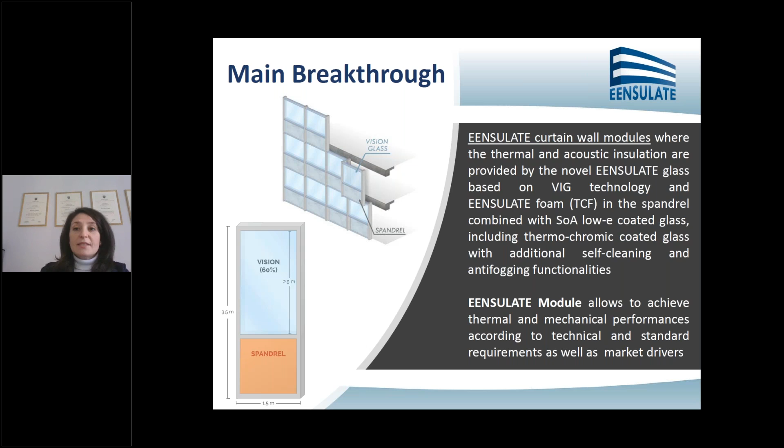Now I'm going to go into a bit more detail concerning the technologies we developed for producing the insulated products. In particular, the vacuum insulated glass is a lightweight and thin double pane assembled thanks to innovative sealant and getter technologies, for the transparent part of the facade as well as for window applications. In addition, for the spandrel part, we developed a highly insulated foam based on monocomponent and bicomponent elements.

Concerning the VIG, the vacuum insulated glasses have been developed by BGTEC, a company based in Poland, with the support of the rest of the consortium. BGTEC developed a tailored manufacturing process implementing both innovative sealant and getter strips to ensure the target performances for the final product, with a target U-value of around 0.36 to 0.44 watts per square meter Kelvin.

During this project, we developed several small-scale prototypes of 500 millimeters and also large-scale prototypes. Currently, BGTEC is assembling the latest real-scale VIG for the pilot's application.

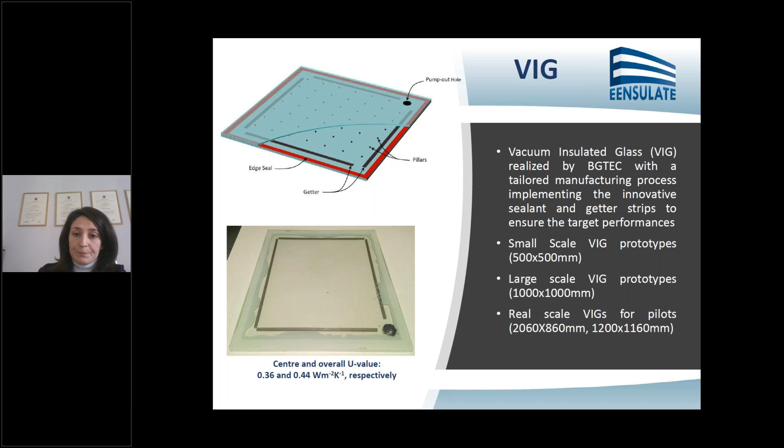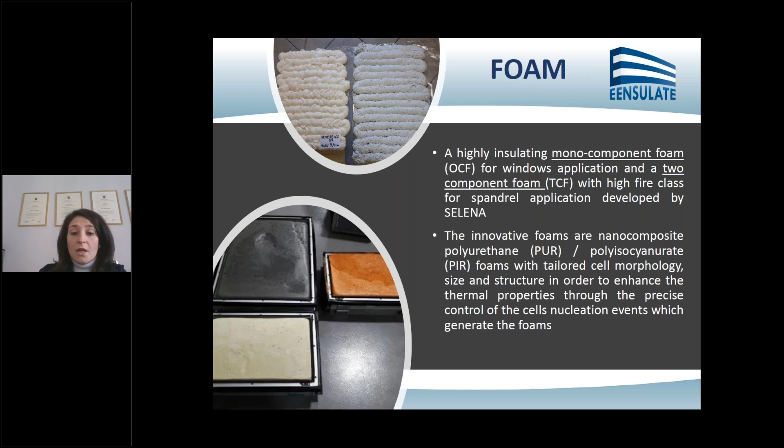Regarding the foam, the monocomponent foam is specifically for window applications and has the characteristic of a very high insulating target. The two-component foam has a high fire class and is tailored for spandrel application. Both have been developed by Selena, a partner of the EENSULATE project and a Polish company. The innovative foams are based on polyurethane foams with tailored cell morphology, size and structure in order to enhance thermal performance through precise control of the cell's nucleation.

Concerning the sealant, it is the sealant used for the assembly of the VIG system is an epoxy resin sealant, and the thermal curing allows a low process at a temperature below 200 degrees. We also have the possibility of having a monocomponent sealant resin in a syringe form, dispensable in a range of 60 to 100 degrees. The sealant has been developed from SAES, who is an Italian company.

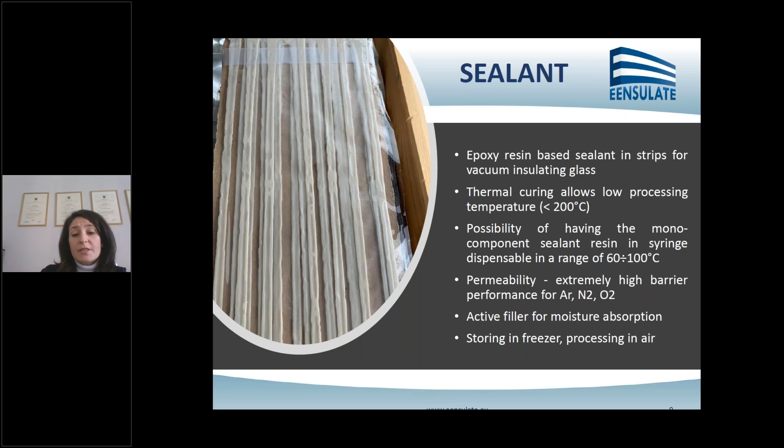This sealant has very high performance in terms of permeability, because it is an extremely high barrier performance for argon, nitrogen, and oxygen. It is necessary to store it in a freezer at very low temperature, but the processing can be performed in air.

Regarding the getter, it is a distributed getter realized with an innovative zirconium-based alloy with extremely high nitrogen capacity. It is very easy to handle and position in air during the production process of the VIG. The getter activation is performed by radio frequency heating under vacuum pumping.

Concerning the museum, it is the second Polish pilot, based again in Dzierżoniów. It is an ancient building, and it is also a historical building, and for this reason we could not change all the windows, but we simply removed them and included the innovative VIG system into the same frame. This is possible simply because the VIG we are developing is lightweight and very flexible for application in different kinds of configurations.

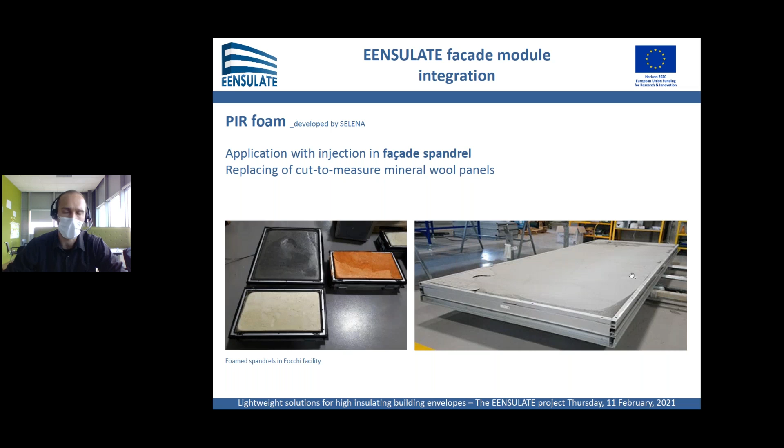Two technologies are crucial for the insulated facade module. First of all, the foam - a PIR foam that should be applied inside the spandrel, so the opaque part of the facade, with the idea to replace the cut-to-measure mineral wool insulation that is usually used in curtain wall facades. This represented a first challenge for the project, to include this type of foam inside the spandrel. The results are interesting and open some opportunities for wider application in industrial scenarios. Some further development is needed, like normal in an innovative product, but it's a very good achievement.

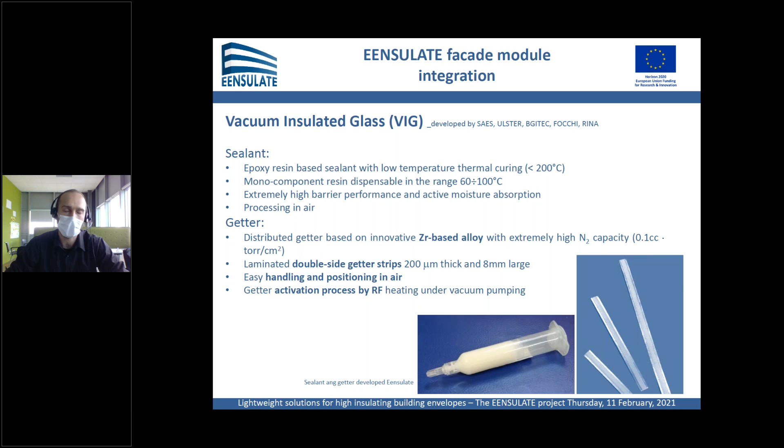The second technology is the vacuum insulated glass. As Daniela has already mentioned, it's quite innovative in how the product is manufactured. In particular, the sealant can guarantee that the coating of the glass will not be damaged during the activation and curing of the sealant. Second, the getter - the strip responsible to absorb the air that eventually goes inside the cavity - achieved very good results, as we are seeing in the tests we are conducting at this very moment.

What are the final results of the VIG useful for the facade? First of all, it's two times better than a commercial sealant for insulated glasses. It represents a very valuable moisture barrier for the glass itself, and allows the use of coatings for glass thanks to the low processing temperature. One of the main issues is how to cure this sealant while preserving the coatings now used for glass, and thanks to this sealant we achieve that result.

The getter, on the other side, allows for a very relevant improvement in relation to other getters on the market, achieving very high performance for the VIG in comparison to other VIG competitors, as well as one of the current benchmarks for the market, the triple glazed unit. Second and third, we demonstrate how this vacuum insulated glass could be laminated to also preserve safety for its application.

How do we integrate this solution? This was the target we wanted to achieve within the project - to achieve a U value for the wall module of 0.7. This was an achievement we designed specifically using one of the demo buildings we expect to renovate during the project. As you can see, this is a unit of 1.2 by 3.6 meters, and the overall target is quite relevant in relation to the current benchmark.

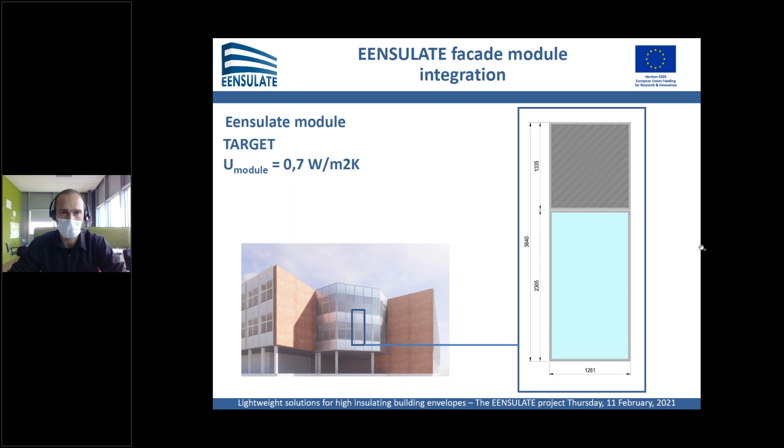What we've done is implement, during the whole project, the integration of VIG, trying to figure out the best solution to improve the facade design to integrate this component. In particular, one of the main issues was related to the VIG - we wanted to achieve the target of 0.3 watts per square meter Kelvin for transmittance, and for the foam, 0.02 watts per square meter Kelvin.

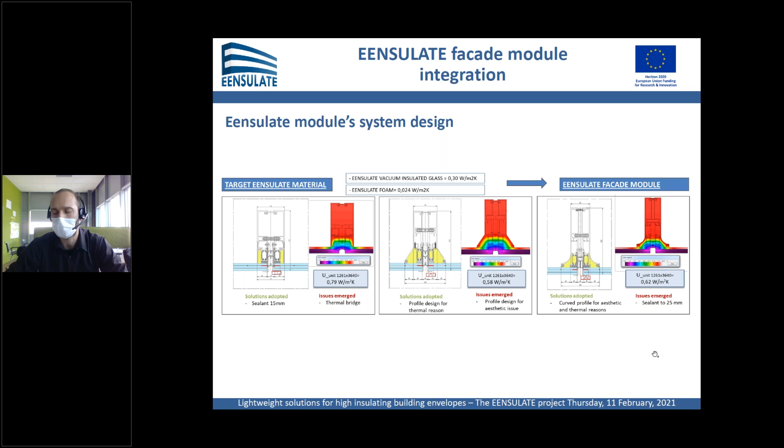The integration of VIG strongly addressed the design of the profile for the facade. First of all, because the sealant represents a thermal bridge for the vacuum insulated glass, we tried to figure out what design could better achieve the result we expected for the module. In the final configuration, you can see the implementation during the different design phases that allowed us to have this type of solution - we finally added a sealant with a 25 millimeter thermal bridge.

The getter is not relevant for thermal bridging because it does not create any continuity between the two glass panes. We designed a curved profile to work with the isotherm for the thermal performance of the facade, and this curved profile works in the same way - we filled this curved profile with an EPS foam material just to help reduce the thermal bridge.

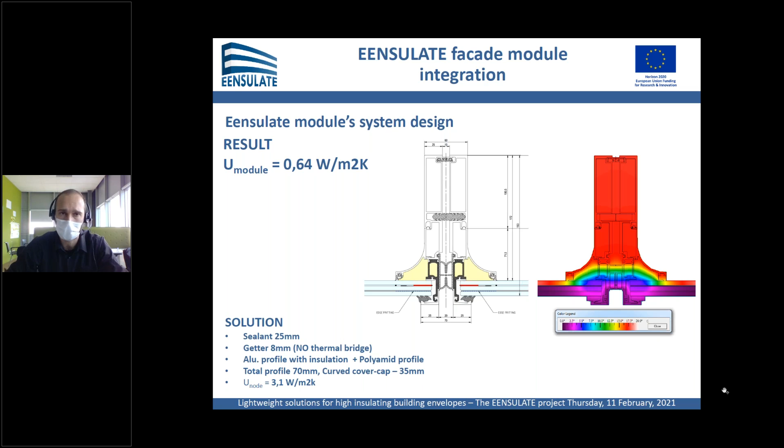With a U value for the node of 3.1 watts per square meter Kelvin, the result is very relevant and perfectly in line with the expected target. So the U value for the whole module, for this vision part of the module, was 0.64 watts per square meter Kelvin. The same consideration was adopted for the spandrel part, where we used the foam, which guarantees very high performance compared to mineral wool because its conductivity is better, contributing to the achievement of the target for the module.

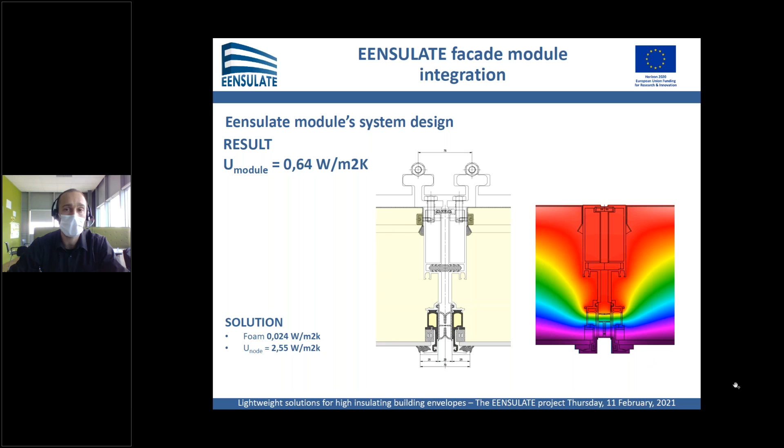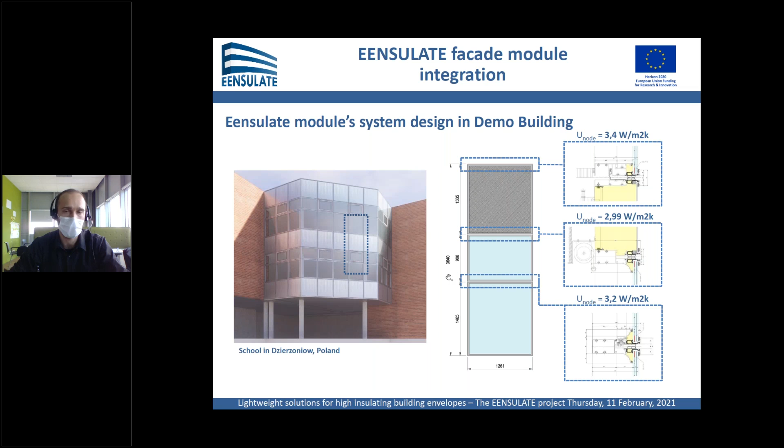We design specifically, as typical on curtain wall facade, the details of the facade, figuring out how everything fits perfectly in the final configuration for the facade, and finally we achieve the configuration of the facade itself. Here you can see the achievement specifically designed by Focchi within the project.

So you can see not only the profile, but also the technical solution we figured out to reduce the thermal bridge. In particular, you can see a thermal break in polyamide that is quite relevant because it absorbs all the thermal bridge caused by the sealant.

And we apply, in this case, mechanical restraint for the vacuum insulated glass, due to the fact that we wanted to adopt something without utilization of structural silicone. But the same facade system solution was also designed for structural silicone, expecting to meet one of the main targets of current architectural design: try to decrease the mechanical restraint presence on the outside of the building.

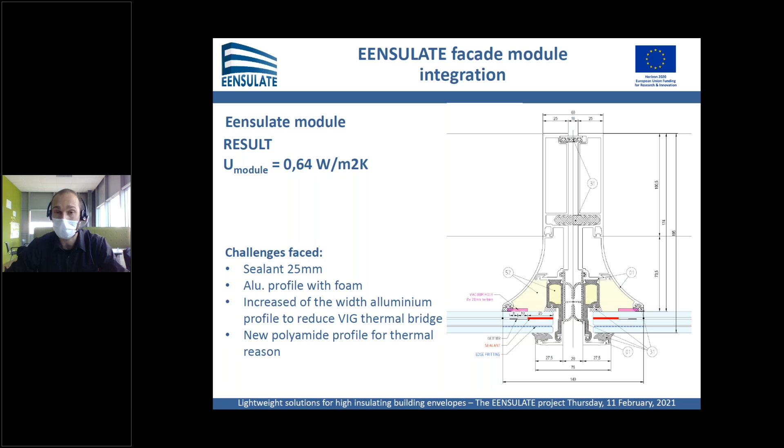Here's a comparison. On the left, you can see the EENSULATE facade module with the main component, so the vacuum insulated glass with the transmittance that is a target. We are perfectly in line. I can anticipate, it's not part of this webinar, but the test demonstrated that we are in line with this target. Then the U value for the node and the unit.

We have the transmittance for the unit, compared with the benchmark on the market. If we designed something with a similar profile for the market, we would use a triple glazed unit and mineral wool. As you can see, it's an improvement of the overall performance of the facade itself.

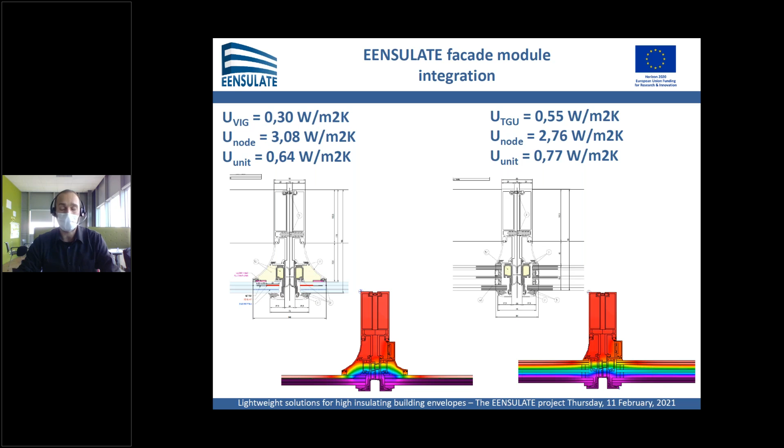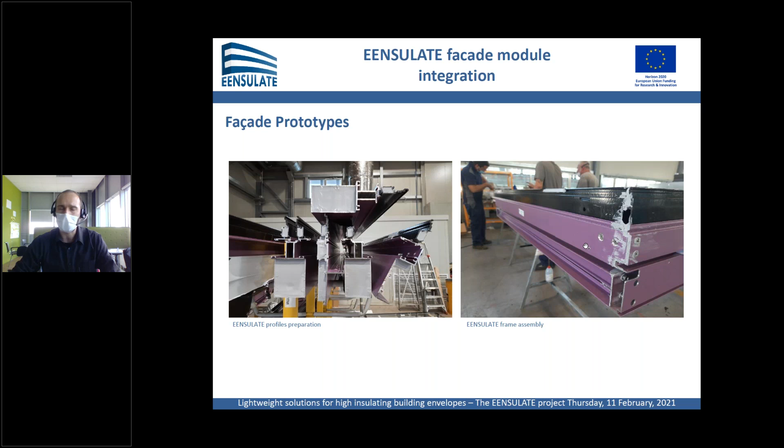In the prototype phase, we prototype everything for the testing activities. So here you can find some aspects of the manufacturing. In particular, we tested how to pour the foam inside the spandrel. A preheat was needed because, being a foam, it needed 50 degrees of temperature before the pouring. So all the procedures were tested and applied in the mock-up manufactured in our facility.

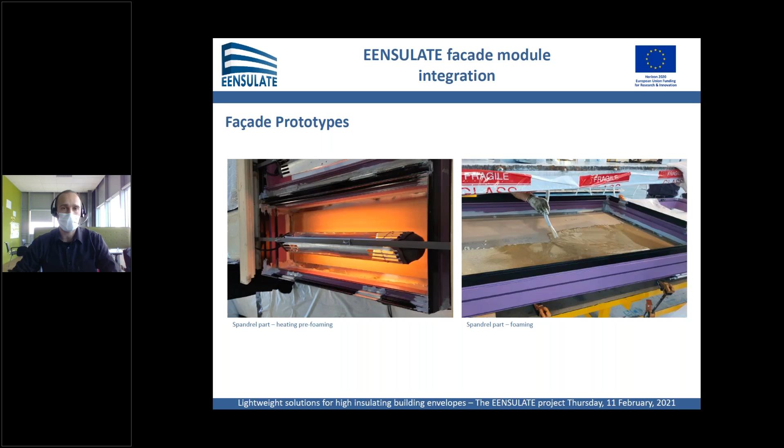Here's the final result. As you can see, it's a good result that could support the consequent glazing of the spandrel part without any particular issue.

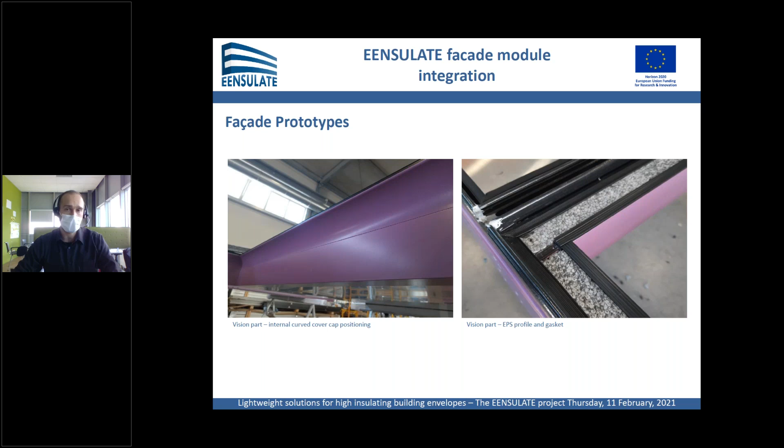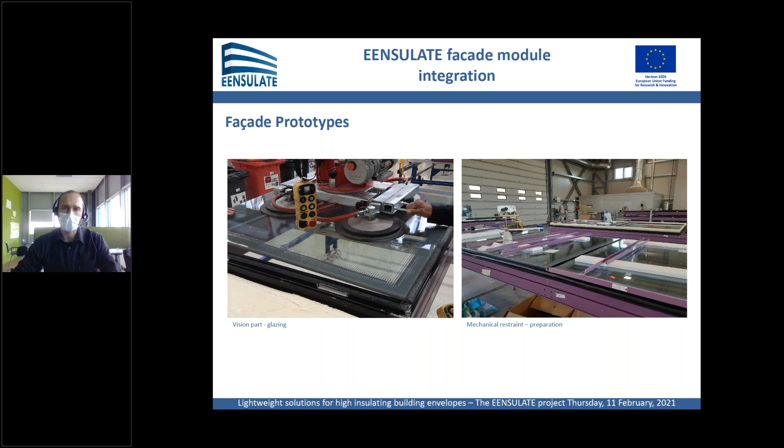Then for the vision part, here are some details about the curve profile and the foam inside the profile itself, and the glazing with VIG. As you can see, it can be managed easily using a suction cup without affecting the VIG itself. Then the unit closing with the mechanical restraint, and the final prototype ready to be tested for the different testing activities.

What are the tests we are now conducting? In these weeks, we expect to finalize three types of tests. The first is the performance mockup, in a test chamber at an accredited entity's premises. The test conducted by this entity will test in line with the norm.

The 13830 norm, for the facade, to obtain the CE certification. In particular, in this test we'll validate everything around the facade. First of all, the VIG performance in the vision part, but also in the vent we have installed. But as well, we want to know if the system works, in the case of benchmarks, so to use as a comparison effectively, what are the differences, if there are.

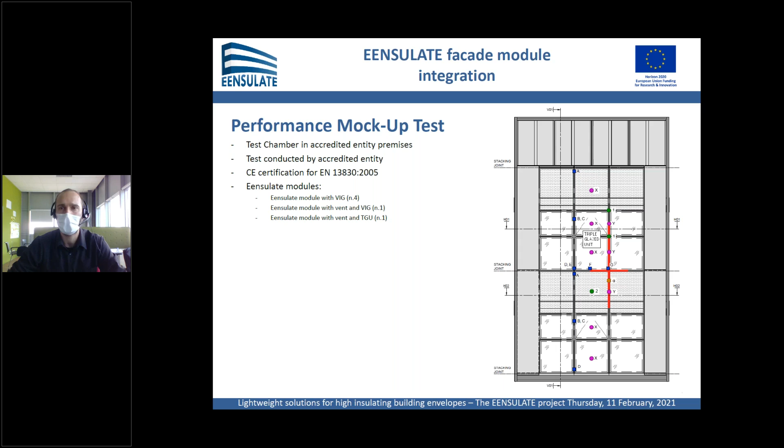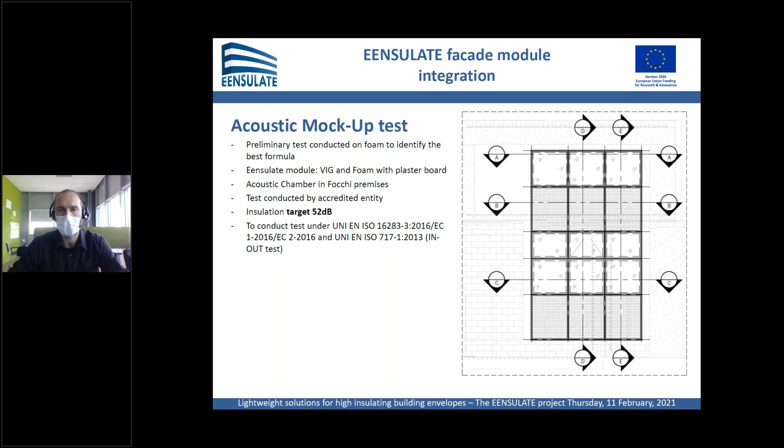The second test is the acoustic mockup. In this case, some preliminary tests were conducted in past years to validate the foam, and we introduced an additional plasterboard to meet the needed insulation of the spandrel. We test in an acoustic chamber here in our facility, with the target to achieve 52 decibels of insulation, in line with the in-out test issued by the norm.

Final, but not least, test is the fire mockup. The fire mockup will allow us to compare the benchmark on the market, so unit with TGU and mineral wool, with the EENSULATE module, so with VIG and foam, and to see effectively how they work, if they work differently, and what are the main differences.

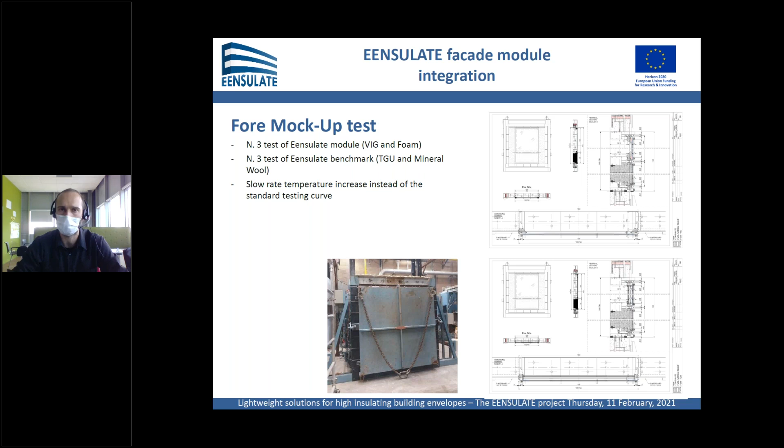We will not use the traditional temperature increase curve by the 13501 norm, for reasons behind the glass sealant facade and so on, but we work on a slow rate temperature increase just to know effectively how it can work and see differences at different temperatures.

Some conclusions about the project: the insulating technologies demonstrate that they can be integrated in a unitized facade, achieving a very high energy standard for the building envelope, working to increase the overall energy performance of the building. Also, quite particularly relevant, is the reduction of facade weight, meaning less glass, less materials, less energy in the embodied component of the facade itself.

The next step is the testing activities, so we aim to achieve the CE certification of the facade and to validate the acoustic insulation of the facade. There are some minor aesthetic issues to be managed, but the team is working on that. That's all from my side, and thank you.

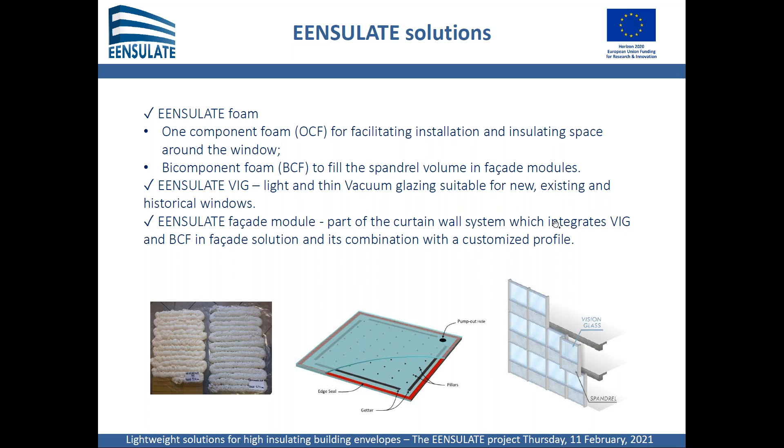Both EENSULATE foam as well as VIG can be integrated in a facade module with customized profiles. Next slide, please.

Retrofitting scenarios were defined to demonstrate the wide applicability of EENSULATE components in different building retrofitting cases, and it can be applied for curtain wall facade. In this case, the EENSULATE module is used for replacement of existing facades as a lightweight solution to reduce the weight of the structure and increase its thermal performance.

And the EENSULATE vacuum glass for substitution of standard triple or double glazing units in existing facades. In case of a new facade, after preparation of prefabricated modules in the factory, installation steps on site include standard procedures like dismounting of the existing facade, preparation of the surface, installation of the supporting system, then unit settling, taking into consideration all connections, sealing, and finishing.

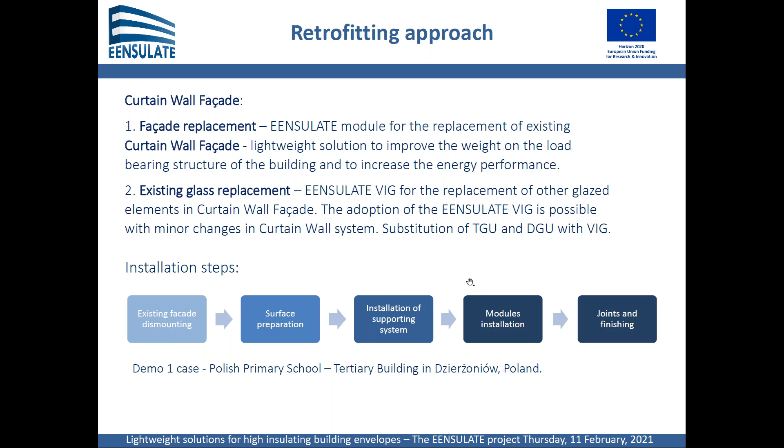Next slide, please. And the second type of application: EENSULATE VIG for replacement of single and standard double or triple glazing in existing windows, for historical and contemporary windows and doors, with improvement of performance without affecting the overall view.

Works are restricted to substitution of existing glazing for vacuum ones only, by window sash dismounting. It's a renovation and vacuum glass insertion, and if necessary, renovation of the frame, then window assembly and sealing. To facilitate and accelerate the installation process, application guidelines were developed within the project before the planned intervention.

Next slide, please. Different project demo buildings have been selected to demonstrate EENSULATE products' adaptability in different retrofitting building cases. Solutions developed within the project and presented before have been installed on 3 demonstration buildings representing different types.

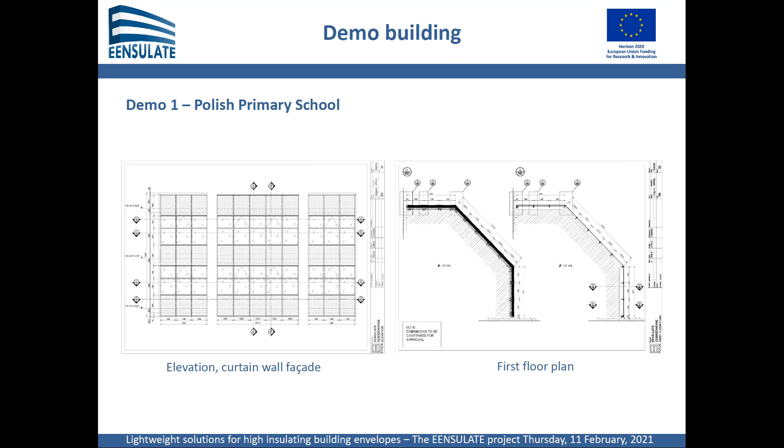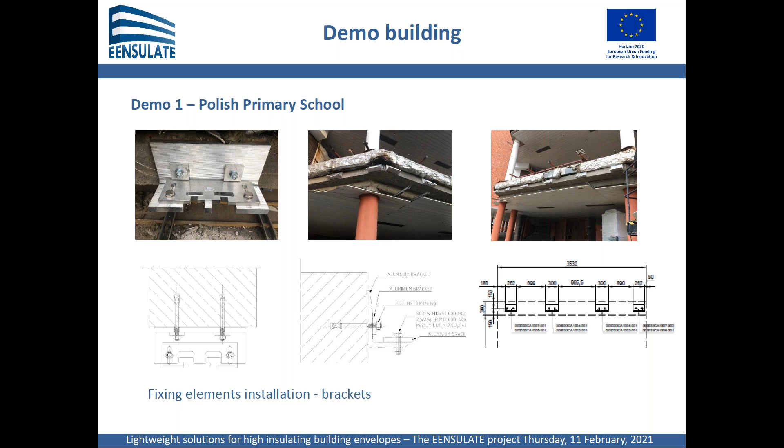The main steps were site preparation and fixing of supporting elements for facade module installation, and proper anchor positioning on the floor in front of the floor slabs is crucial for undisturbed unit mounting.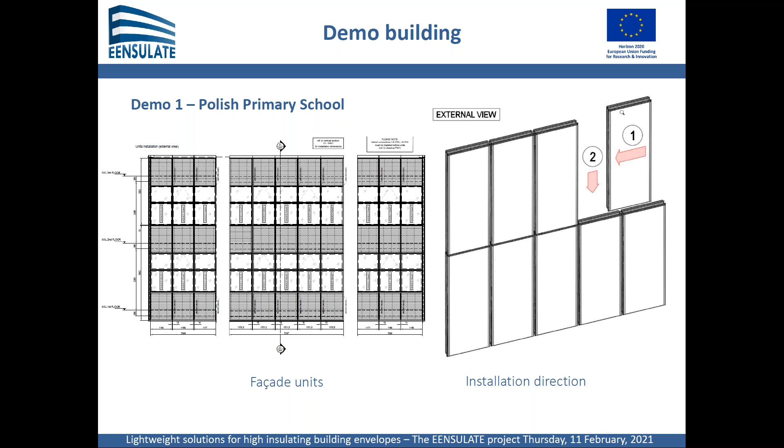The next step is to settle the facade modules into position marked on the drawings and secure them to the building.

In this case, the works were conducted from outside. Units were lifted by crane from the storage place on the ground near the building, and directed by the staff to be installed onto anchors fixed on the slabs.

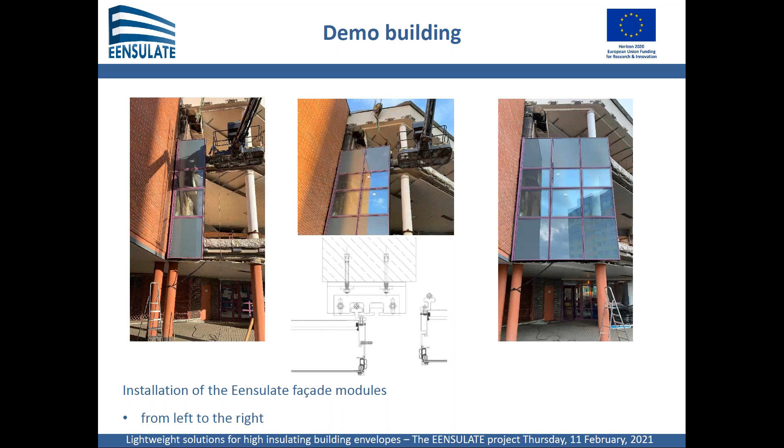Installation proceeded from left to right and from bottom to top. Additional components like gaskets, sealing, and joints should be properly applied to preserve the impermeability of the facade wall. On the slides, particular steps from the installation are presented.

The new facade after intervention is shown, and comparing pictures before and after installation, it can be noticed that the shape, divisions, and facade colors are almost the same.

The second demo is a historical city museum building from 1897. Today the museum hosts exhibitions concerning the city and surrounding area. Being a historical building, the museum has restrictions regarding modification of elements of its construction.

It was requested that the new windows' appearance be exactly the same as the existing ones. Thanks to the insulated vacuum glass, it's possible to substitute the existing poor performing old glass with better performing glazing, keeping the same construction of the windows, thanks to the thinness and lightweight construction of the new glass.

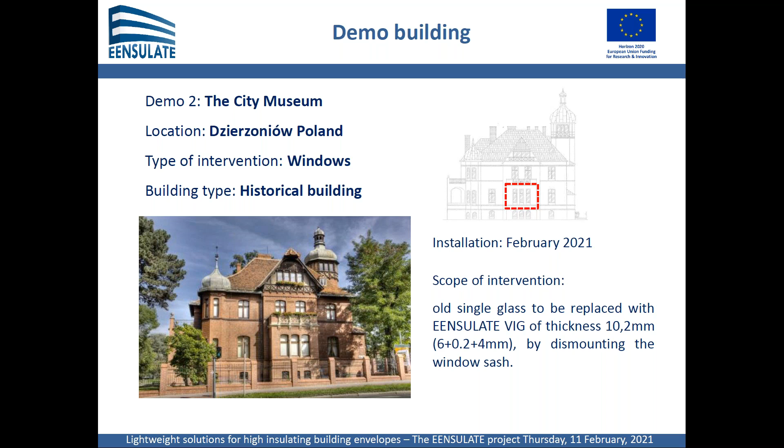In the case of the Polish museum, the scope of activities within the EENSULATE project foresees substitution of old single glass with EENSULATE VIG of thickness 10 millimeters and weight 25 kilograms per square meter.

Existing windows are old box windows with double sash opening to the inside, filled with single glass. Here are photos presenting inside and outside views.

The window sash has been carefully removed in order to perform necessary renovation works, and then the single glass will be replaced by vacuum glass, and the same element will be installed into the existing frame.

Works are still ongoing, and the sash is uninstalled, currently under renovation at the company facility. Vacuum glass fabrication is almost finished, and installation is planned for the next weeks.

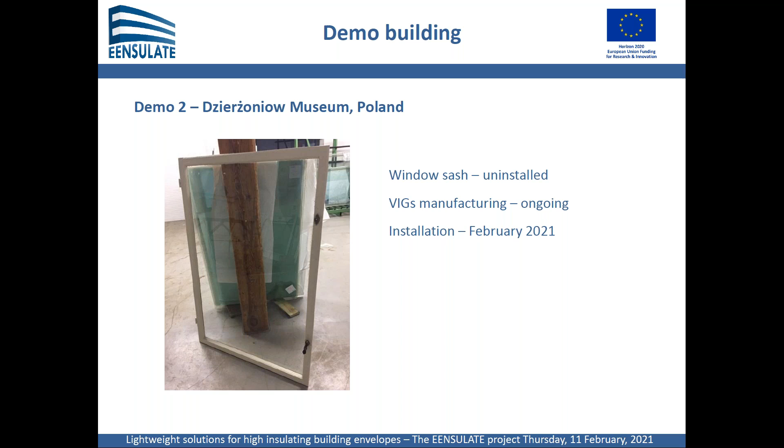In case of historical buildings, restorers usually are not willing to give permits for interventions that exceed necessary works, so it usually has to be reduced to a minimum. But thanks to vacuum glass, there is no need to replace existing old windows, keeping the same appearance while increasing glass thermal performance and giving the possibility of adapting the solution to this demanding type of building.

The third demo pilot subjected to EENSULATE retrofitting is the San Giovanni Public Library, located in Pesaro, Italy. It's a historical building renovated in 2000 with many contemporary elements.

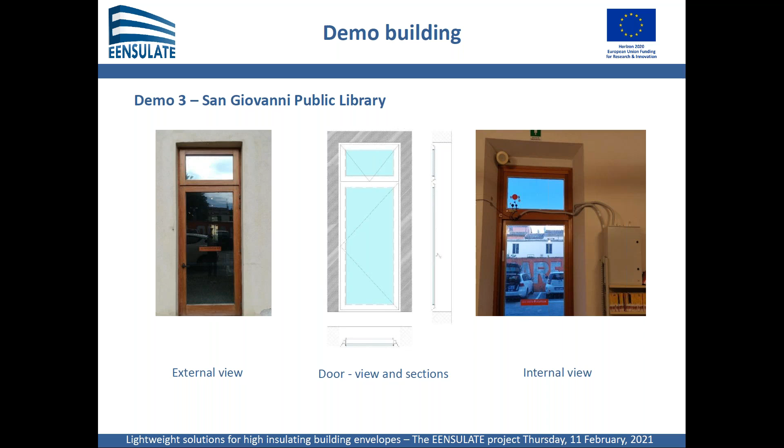In this case, the retrofitting includes utilization of EENSULATE vacuum glass, replacing the existing double glazing in the wooden door frame, without affecting the aesthetic of the building.

After installation activities, the solutions are currently under validation in the monitoring phase. In order to investigate the performance of the VIG model, the building will be monitored regarding thermal and optical behavior, but also indoor comfort, to compare vacuum glass with existing glazing.

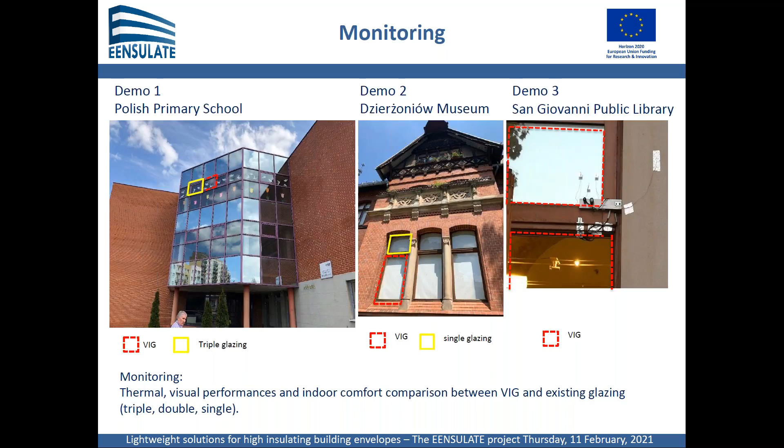As a summary, the main advantages of VIG units, beyond improved performance, considering the installation process, are low weight: triple glazing at 30 kilos versus vacuum glass at 20 kilos, with improved parameters.

Also a thinner construction: 12 millimeters versus a 36 millimeter package for triple glazing, which leads to reduced window and facade profile construction, and facilitated logistics due to the reduced weight and space necessary during transport and storage, but also during installation.

There is also the possibility to improve indoor comfort and thermal performance, even in retrofitting of demanding buildings such as historical ones.

For manufacturing the vacuum glass, tempered panes are used, and it is also possible to laminate layers with external panes, which is important for installation at height due to safety reasons, in order to avoid falling risk in case of pane breakage.